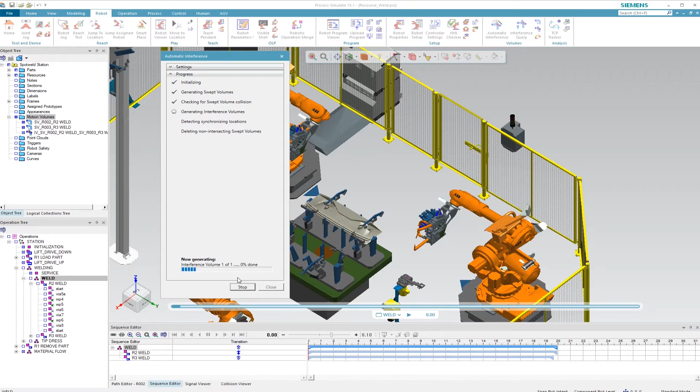The created volumes are now displayed under Motion Volumes on the left-hand side of the object tree, and I can display them in the 3D visualization. Calculated volumes are shown by the blue markings.

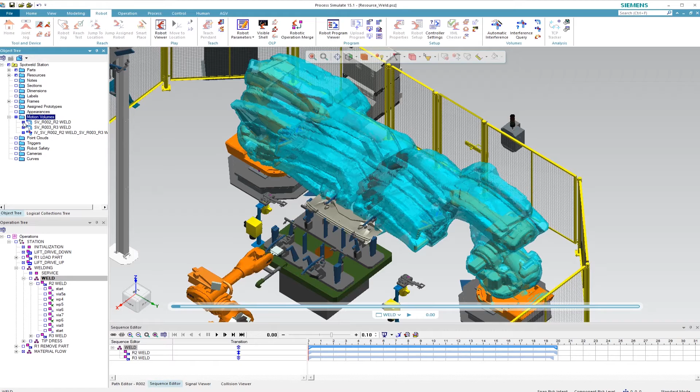The volume of the welding tools on the left-hand robot is displayed on the left-hand side. The volume of the second robot is displayed on the other side. If you hide both in the object tree, you can see the overlapping collision volume of the 2 robots, that is, the area where the motion zones of both robots overlap.

This describes the zone where collisions can occur. Next, we can test the interference queries and see the details of the previously performed calculations.

The location displayed first describes the last location before the collision area is reached. The second describes the first point that is reached after exiting the collision area. If we look at the OLP command on the first welding application, we see 2 different locations. These locations are relevant for the following calculation of collision-free robot motion.

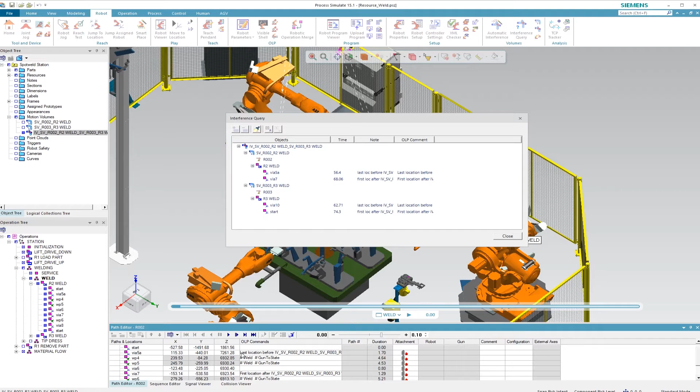Next, we have to supply the robot with logic. I'd like to demonstrate this to you based on a robot.

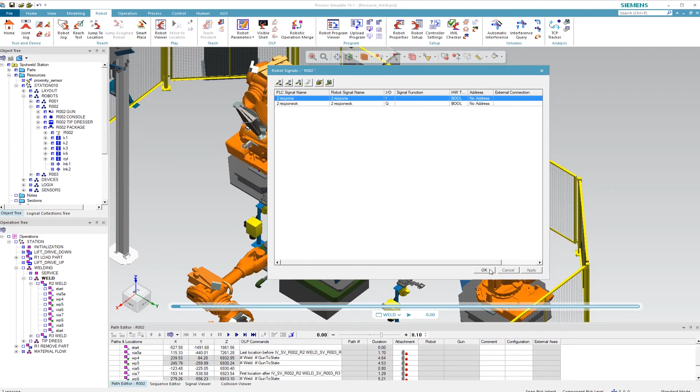We open the Robot Signals editor and add 2 signals to define the zones. For this, we'll need 1 input signal each, in our case, 2-rezzone, and 1 output signal, in our case, 2-rezzoneok. These signals are relevant for synchronization with a second robot. Nothing else needs to be done at this point.

Now we have to link the previously created inputs and outputs in the OLP commands. We start with the first location. Here we'll add an input signal with add, standard commands, synchronization, set signal.

We select the previously created input and set it to 1. This means that for this location, the zone is reached. The result can be observed in the displayed window. Next, we'll add the command which is used to query our output whether the zone is occupied.

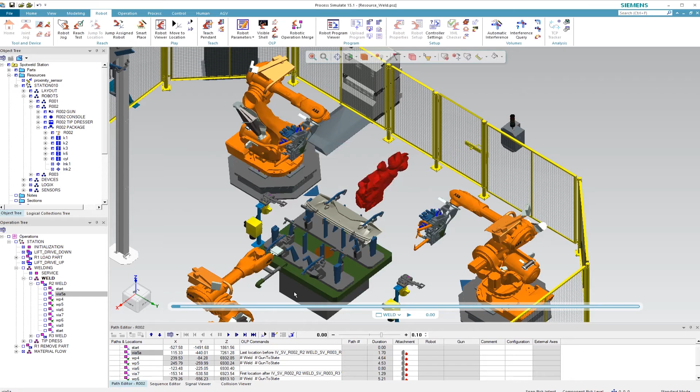We repeat the step for the other location. We define the zone to be 0 and then query whether it's clear, respectively 0. As you can see, the procedure is always quite similar. These steps also need to be carried out for the second robot.

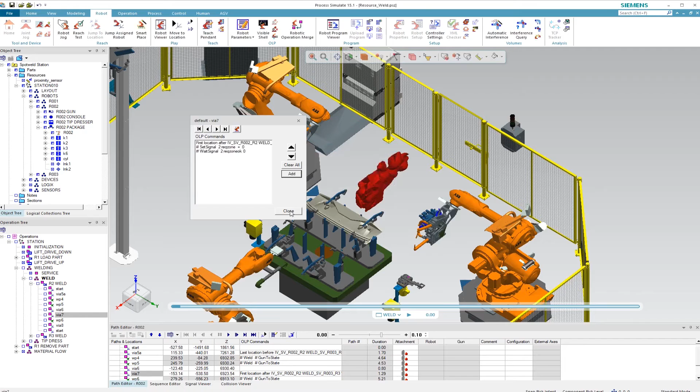Up to this point, these were the necessary steps in Process Simulate. Now we'll switch to TIA Portal in order to create the logic on the controller part. The same signals are required for this. As you can see, I've already added the 4 variables with identical names.

To integrate the logic into the robot process, we'll have a look at the associated graph sequence. Therefore, I have to query the corresponding inputs and outputs. The process is similar to the previous steps in Process Simulate.

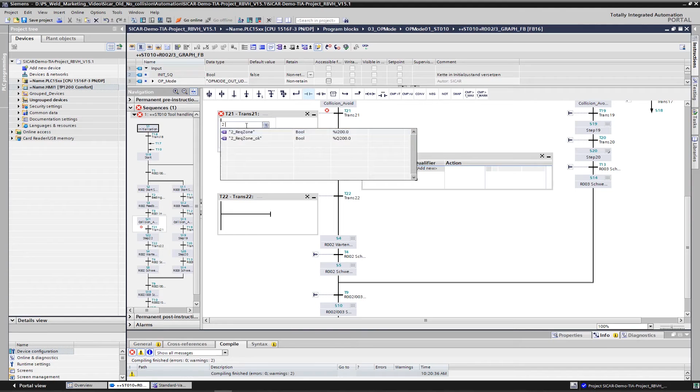In the transition shown, we ask whether the zone of one robot is occupied and the zone of the other robot is clear, that means not occupied. So far, quite logical. Next, we'll define the action in our graph sequence chain, in other words, what to do when the transition is fulfilled.

In our case, the 2_ReqZone_ok output is triggered. The robot is now permitted to move in the zone. This step remains active until the robot exits the zone again.

Normally, we'd have to repeat the task for the second robot. Logic creation is now complete, and we can download our TIA Portal program into the PLCSIM Advanced Virtual Controller.

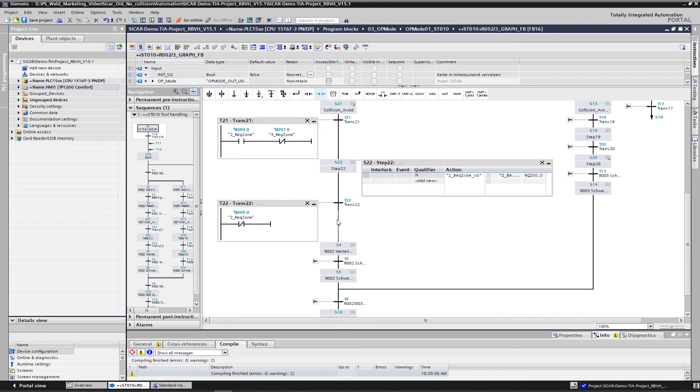In the following step, we switch back to Process Simulate and start the simulation in Line Simulation mode. To start the control program, we'll use our HMI visualization and, in the first step, carry out an initialization to reset all values to the initial state. Then we start the simulation.

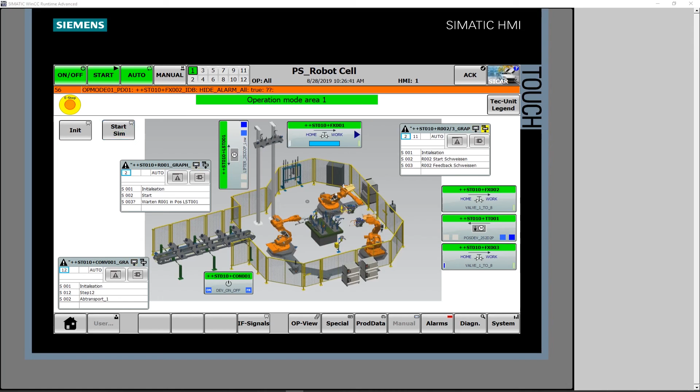The sequence of the process can now be observed in the HMI visualization and, of course, also in Process Simulate. Let's see what happens and whether or not there's a collision.

What's different from the first time? The robots are now welding one after another, so that one robot welds first, while the other waits until the area, the collision zone, is clear.

Collisions no longer occur because Process Simulate calculates the volumes of the robots and their associated tools in the background and prevents a collision.

By using Process Simulate, you'll save time and money while optimizing your commissioning phase. Siemens, ingenuity for life.